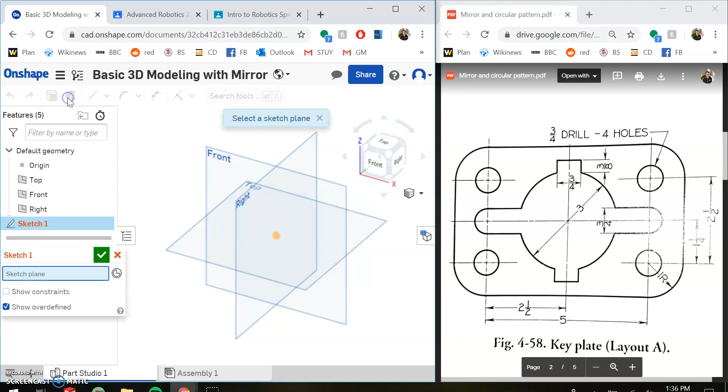So let's start by creating a sketch, and we'll put it on our top view. Again, I expect you guys to be making this along with me, and I'm going to ask that you submit it. So make sure that you're creating this. So I'm going to create a rectangle, but instead of using a standard corner rectangle, I'm going to use a center point rectangle because I want to keep everything centered on the origin. Okay. So I'm going to click here.

And then I want to modify the dimensions of this rectangle. D on my keyboard. Now I have to figure out what this dimension should be. Now I'm making a bounding rectangle. This entire shape is going to fit within that rectangle. As I look here, I see this dimension is 5 inches, but that's not the total horizontal dimension. We have these two arcs here that extend out, and the radius is 1 inch. So this is going to be 1 inch more on this side, 1 inch more on that side. 5 plus 1 plus 1 is 7.

Hit enter. Now dimension for the vertical portion. We have 2.5 inches here, and again we have these two arcs that are 1 inch in radius. So 1 plus 2.5 plus 1 is going to be 4.5. Okay, we've set up our bounding rectangle. Now what we're going to do before we draw any of these circles or arcs is I'm going to put a construction line that goes down the center of this and in some other spots where it makes sense for setting up these circles. So how do I do construction lines?

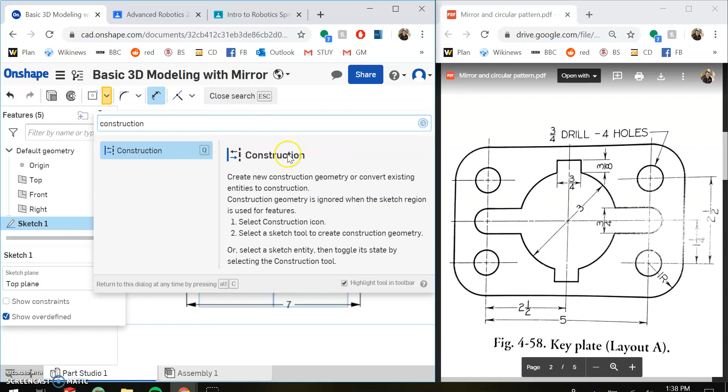Well, here's what we do. We go to this drop down here and we scroll down and we find construction. If you ever have trouble finding it though, you can always type it into the search bar up top. So now that I've selected construction, everything I draw, whether it be a line, circle, rectangle, whatever it is, is going to be a construction. You see that it has this different pattern. That indicates it's a construction line, and it will not affect anything that's extruded. Let me just delete this last bit. What it will do, however, is it'll allow you to base dimensions off of it.

Let me show you. So I'm still drawing for construction right now. So I'm going to draw a construction line that goes down the middle. Oh, I'm not in construction. Let me delete that guy, and go on this drop down and select construction. Draw a line down the middle here. Draw another line down the middle here. And you'll notice these lines are not construction. I need to actually go through and make this construction. There we go. All right.

Now, I want to also, for these circles, draw construction lines where these center lines fall. So I'm going to draw, for construction, a line here. And I'm also going to draw a line here. Make sure this is construction. These obviously are not in the right spot. I'm going to need to dimension them, which is what I'm going to do right now.

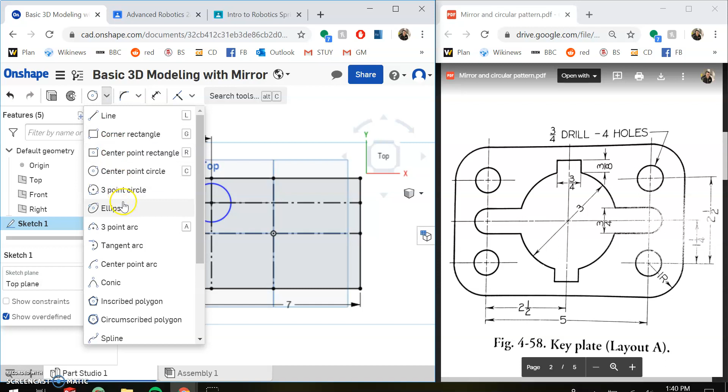So I'm going to draw a circle. I press C on my keyboard to do that. And I'm going to draw it clearly too big. And then I'm going to draw a 3-point arc, or a center point arc might be better. Let's see what this says here. Click to indicate the center point. Click to indicate the starting point. And click to indicate the end point.

That's good here. So I'm going to select end point. Start point, end point. Oh, cool. So center point, I misspoke there. I click the center point. Let's do that again because I misspoke. Center point, start point, end point, 3-point arc.

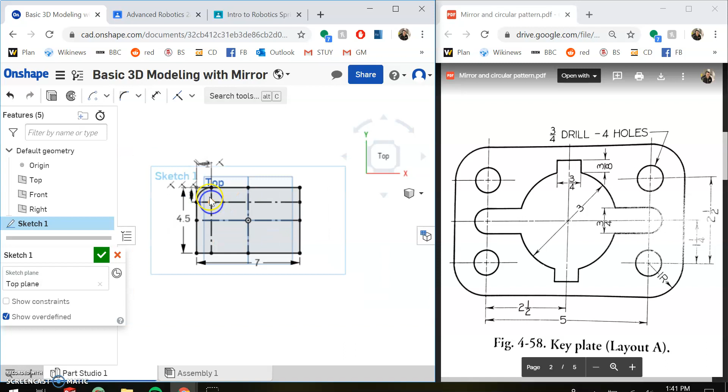Beautiful. Okay. Now I need to dimension the circle. Let's see. What's the size of these 4 holes? 3/4 inch drill. Drill means diameter because that's the size drill bit you would use to create this. So I'm going to type in 0.75. And voila, I've made my circle and arc here.

Now what I want to do is I want to replicate this in the other 3 corners. Now I could draw more center lines to do that, and just do the same way I just did, but then they would all be treated independently, and I wouldn't be able to modify them all together. I would need to modify them one at a time if I wanted to make a change.

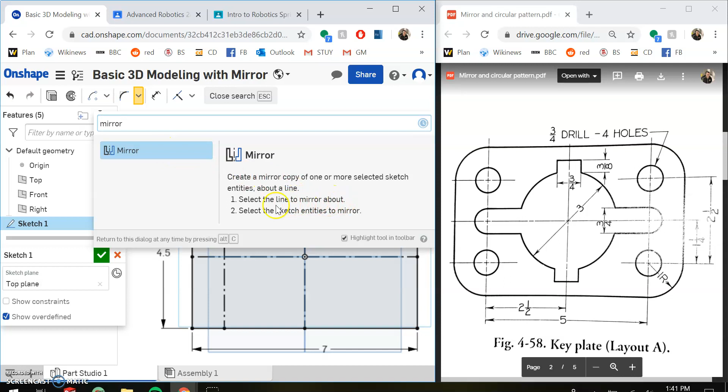So I'm going to type in mirror into the search bar, and I see the preview: select the line to mirror about, and then the second thing is select entities to mirror. Sounds pretty simple. Okay, select mirror, and I see it selected up here, and it shows a preview of what this command does. Select a mirror line is what it prompts me to do up top. I select this horizontal line, then my entities to mirror are going to be my circle and my arc. And then when I'm done, I can just hit escape.

Now I want to do mirror again, so I'm going to select that. And for my mirror line now, it's going to be this vertical line. And my entities to mirror will be my 2 circles and my 2 arcs. Click here, and I'm done. This is really nice because let's say I wanted to change the size of this to 0.1. It changes all of them. If I wanted to change it again, make it 1 inch, it changes all of them. Let me put them back to 0.75.

I also can change the location of them all together. Let's say this distance here, I don't want it to be 1 inch. I want it to be 2 inches. Or let me make it something more reasonable that won't look crazy. Let's do 1.5 and 1.5. You see that they all shift together because they're based off of each other. Not only is their size based off each other, but their position. So if you're dealing with something, like we often do in robotics, that's symmetrical, you can do these really nice patterns, these mirrors that allow things to work nicely.

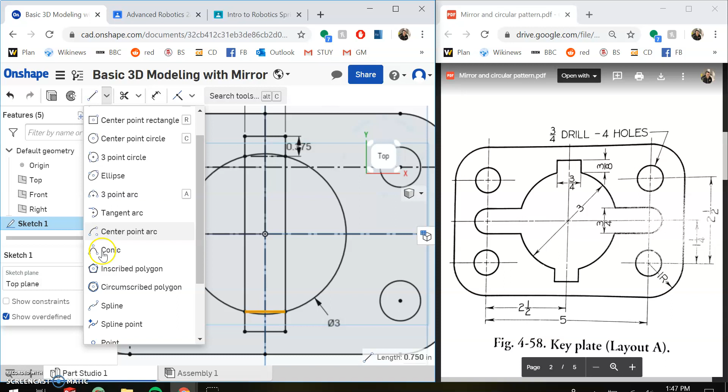And now what I can actually do is I can just do the same thing on the other side. I don't think this is a place where we want to mirror really, because it's a little weird. But you probably could. My brain power is not quite there right now to get it to work that way. Okay, we'll make that 3/8 as well. Oh, of course, I don't need to do this because this is a center rectangle, so it's already symmetrical.

All right, so I can just trim some stuff. Trim away these arcs here. And trim away these lines here.

Okay, this section is now complete at the right size, and if I want to modify anything, I can change how far this sticks out. If I want to make it 0.5, it'll stick out a little further. It'll change on the other side. Back to 3/8, I can change this distance to be 1 inch, and it'll just spread out further. So it's really nice because it does it everywhere. But let's put it back to what it's supposed to be, which is 0.75.

Okay. Now, last thing we need to do is these two sides. I'm just going to do one side, and then mirror to the other side. If I look at this arc here, I'll see that it's actually on the same center line as these two holes, and I actually have that construction line right here to work with. So let's use it.

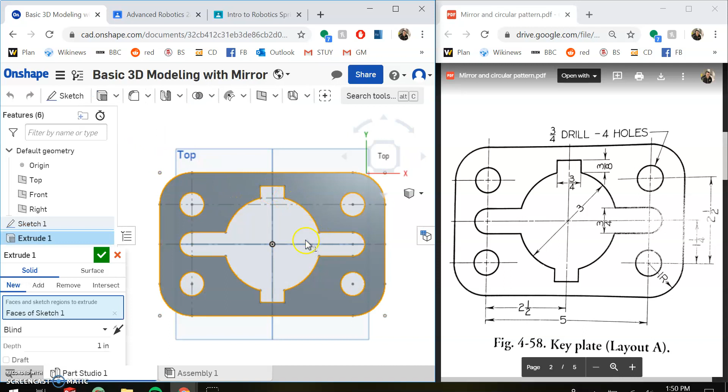This is already good. Now that we've finished that, we can extrude, which is Shift E. Okay, right click to rotate, and we'll extrude this one a depth of 0.125 inches. So 1/8 of an inch. And done. Save it. Actually, I won't save it locally. I'll just save it on the cloud, and that's it.

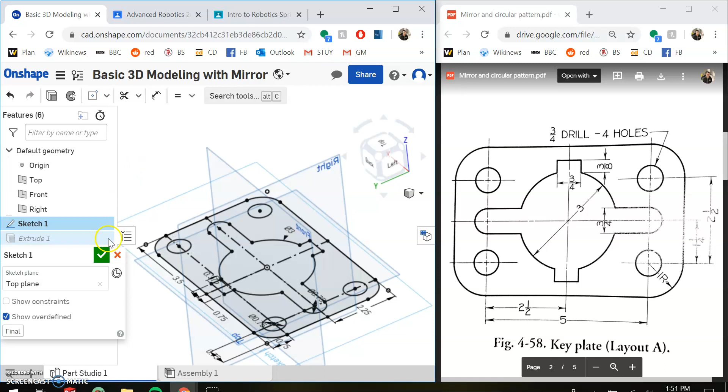So again, the mirror command, very useful. I can go back into the sketch. I can edit some things. Let's say I want to edit this distance to be 0.75 here and 0.75 here, so changing my arcs that I'm working with, these corner arcs. Well, it'll update the entire thing. Control Y, Control Z just to see how it changes. And that's just by changing two numbers.